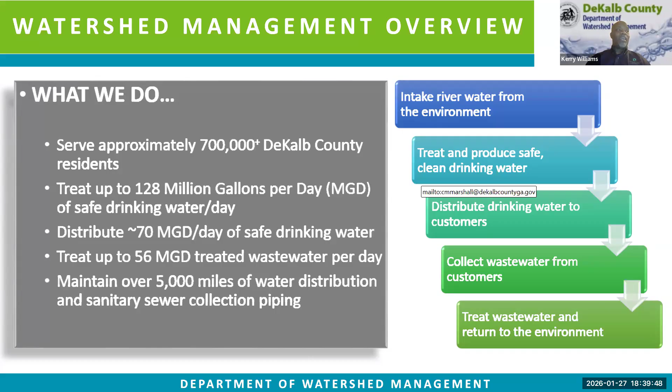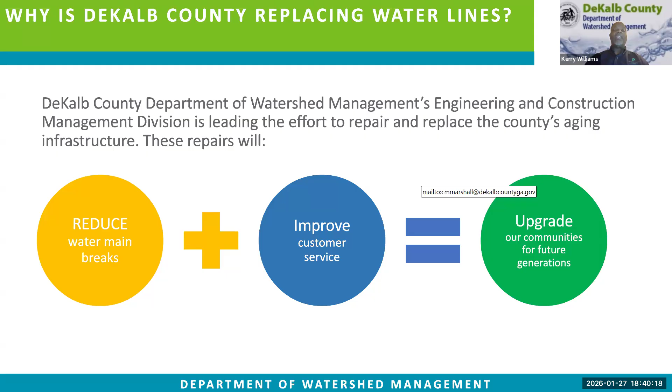How do we do this? We do this via an in-house team along with contractors and consultants. We have engineering firms such as AECOM, which is an international firm, RGI, which is a contractor, and other entities that actually help assist us in these types of projects, construction management groups, and other firms.

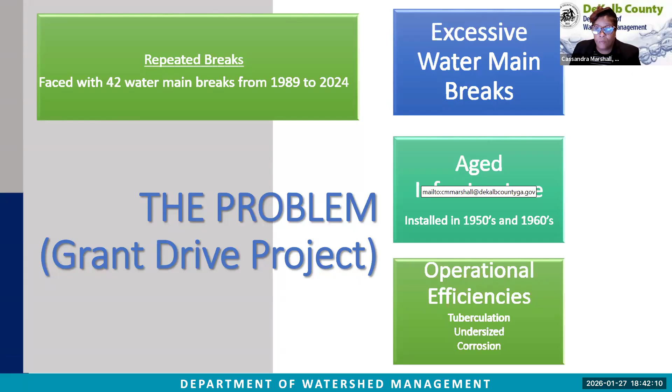In 2024, our Board of Commissioners approved a new CIP plan for $4.27 billion for projects to be completed from 2025 to 2034. The Grant Drive Water Main Replacement Project is a $3.8 million project within that plan.

First, a CIP is a capital improvement project. It can either be a new construction, replacement, or just maintaining or improving an asset.

My team is responsible for getting the work done. My team includes 4 DWM construction managers and 12 licensed inspectors. Along with in-house staff, we are supported by consulting firms who help assist the county with construction management and inspection services. Hopefully, these improvements should last a minimum of 100+ years.

Next up in the presentation, you will hear from our DWM construction project manager, Arre Kennedy. Mr. Kennedy is a licensed utility manager and a licensed contractor who has over 40 years of construction experience.

Thank you, Ms. Marshall. As Ms. Marshall stated, I'm one of the construction project managers overseeing this project.

The Grant Drive Water Replacement Project involves installation of nearly 6,600 linear feet of new 8-inch ductile iron pipe water main, including service lines, fire hydrants, valves, pavement restoration, and water meter boxes to grade.

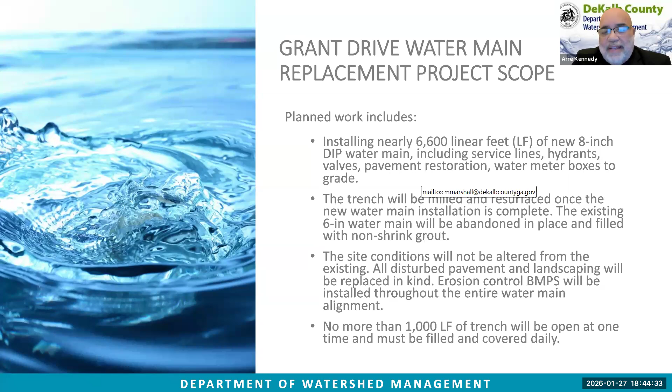Erosion control best management practices will be installed throughout the entire water main alignment. No more than 1,000 linear feet of trench will be open at any given time and must be backfilled and safed up daily.

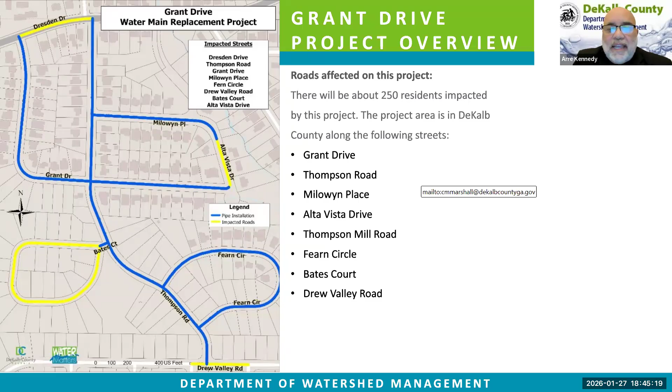But again, each night, these areas will be safed up and through traffic will be allowed. At this time, you will hear from Miss Ginger Gay, my supervisor inspector, who is more of the boots on the ground in the day-to-day operations. Thank you, Mr. Kennedy.

So, boots on the ground. Basically, my team will be there to ensure that all the erosion control and sedimentation controls are in place, that the contractor installs the pipe correctly, and we will handle any customer complaints.

We'll coordinate with the other municipalities, Brookhaven. We will ensure traffic control is maintained for the residents that live in the area, children getting on and off the bus, and we will also ensure safety measures.

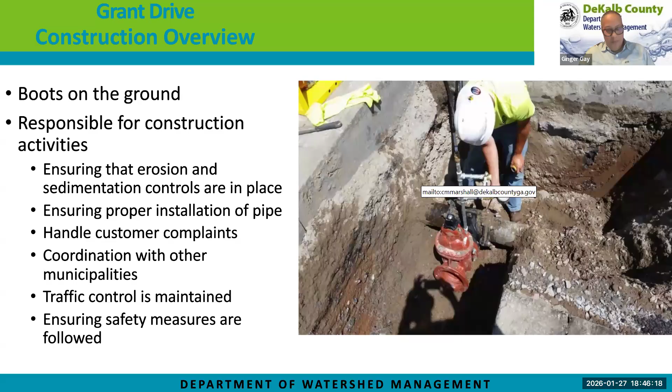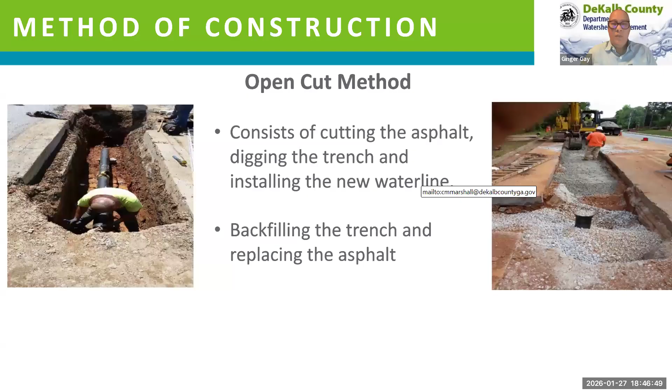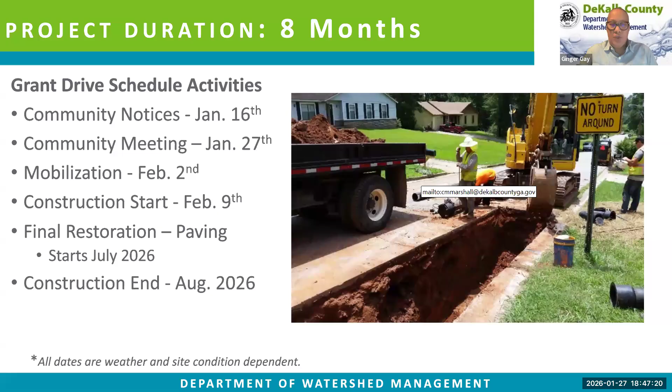Project duration: this is an 8-month project. Today we are having a community meeting. On January 16th, community notices should have been passed out. Mobilization from the contractor will be February 2nd. Construction starts February 9th. Final restoration, which is paving or any yards that have been disturbed, will be starting in July, and end of construction will be August 2026.

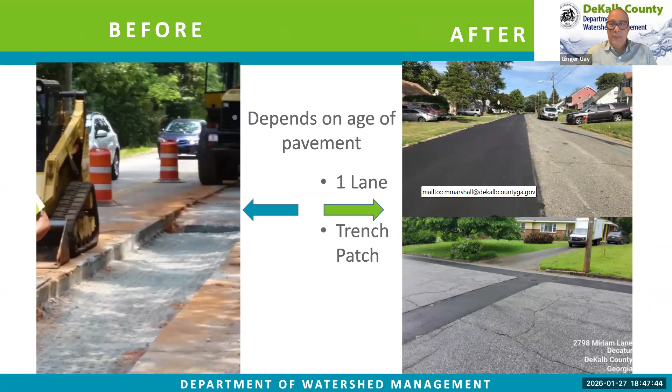Now I will pass this along to Ms. Marshall. All right, thank you, Ginger. At this time, I will now address community concerns and what the community should be aware of.

All right, so unfortunately, what comes with construction are inconveniences. We want to try to minimize those inconveniences. What you're going to see is a lot of foot traffic, construction deliveries, and construction parking throughout your neighborhood.

As a security measure, we do require our contractors and our employees to have some type of county identification and badges so you know they are working with the county.

There's going to be increased noise in the areas from the backup alarm, the asphalt saw cutting, and the removal of the asphalt. Also, we will all clearly have our work zones delineated by orange cones or barrels.

Our typical work hours are from 7 a.m. to 7 p.m., Monday through Fridays, and sometimes weekends.

Residents will always have access to their driveways during construction. It may be a small interruption when we're installing the pipe past your property. However, the contractor will pretty much knock on your door that morning before he starts that work to make sure you need to get out or do not need to get out of the driveway. And if you needed to get out, we'll probably ask you to park on the street for the day.

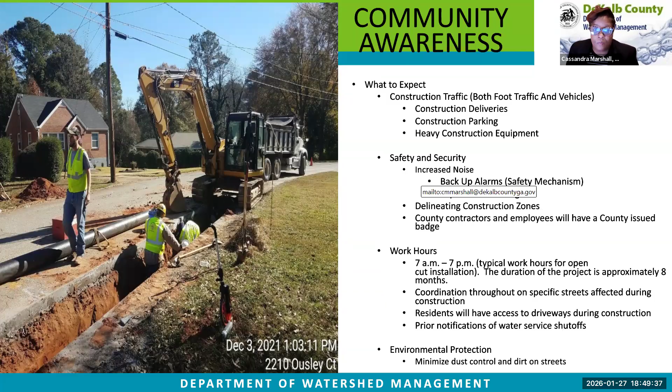Community awareness. So the construction yard sign, not sure if it's up yet, but we do require our contractor to put these up in advance of us starting any work in the area. If they're not up, they should be done prior to the construction start.

You will now hear from Ms. Alicia Penny about public communications update.

Thank you, Ms. Marshall, and good evening, everyone. My name is Alicia Penny, and I'm the Public Relations Manager. Tonight, I will be sharing with you the ways in which we will communicate with you throughout this project.